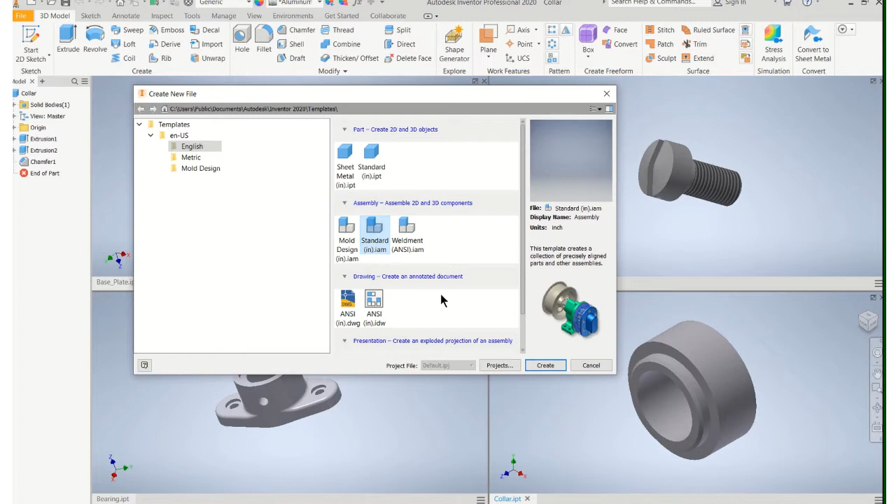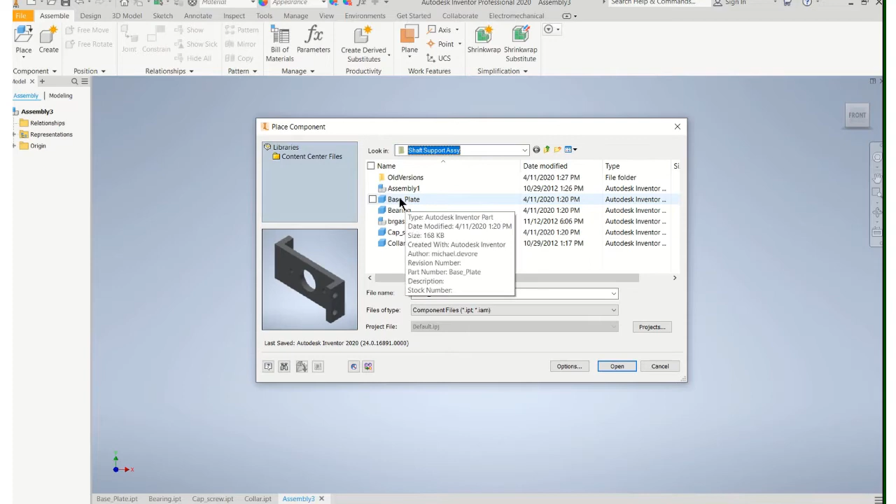So we'll start a new assembly, standard inch IAM, create, and I'm going to just have my one screen up here. Now, whenever you start, you always want to start with a main component of the assembly. Don't start with something small like the screw, for example. You always want to start with, in this case, the base plate. Let's zoom out a little bit, that's fine. So you left click, right click, and say OK.

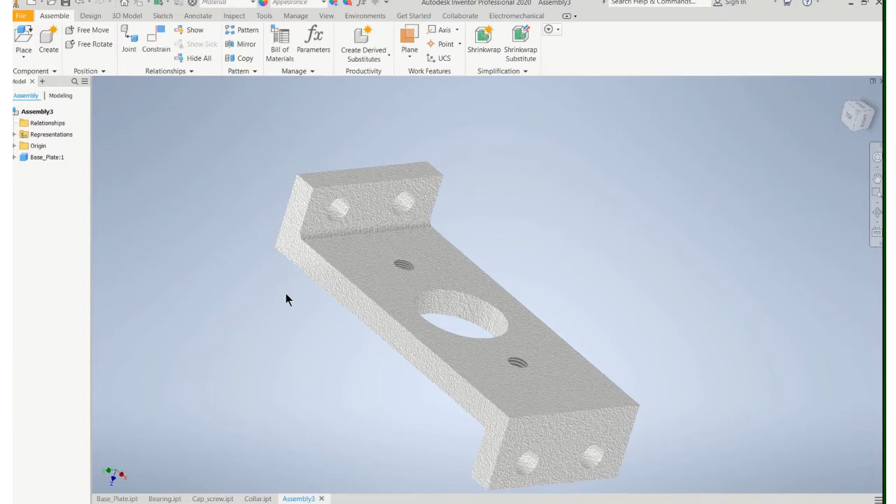Alright, so there's my base plate. And then I'm going to add parts to that in an order that makes sense. So the next part that I think I would add would be the bearing that sits on top of those, on that. So place the bearing.

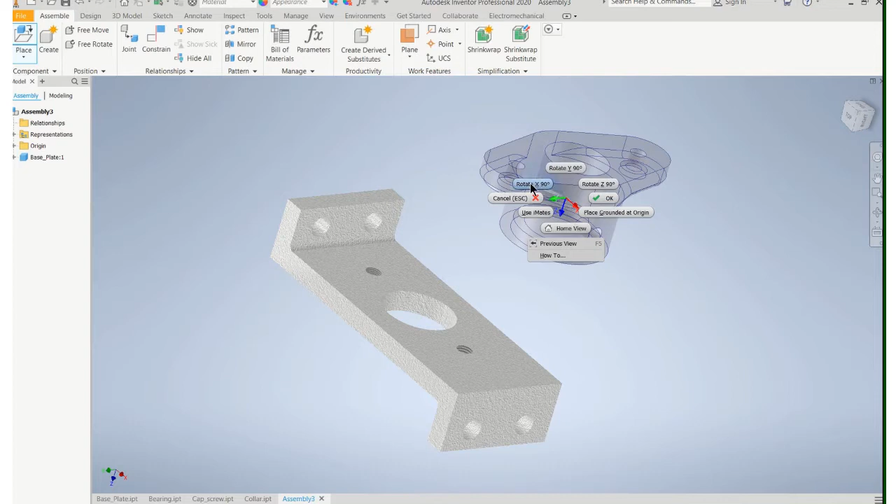Now before you say OK, try to orient this piece so that it's close to the way it's going to be when it's constrained here. So take a look at your axes. The red axis is X. If I spin it around the X, I can get the bottom surface the way that I want. Right click, rotate X 90. One more time, right click, rotate X 90. That's pretty good, let's stick with that. So now I'm going to left click, right click, and say OK.

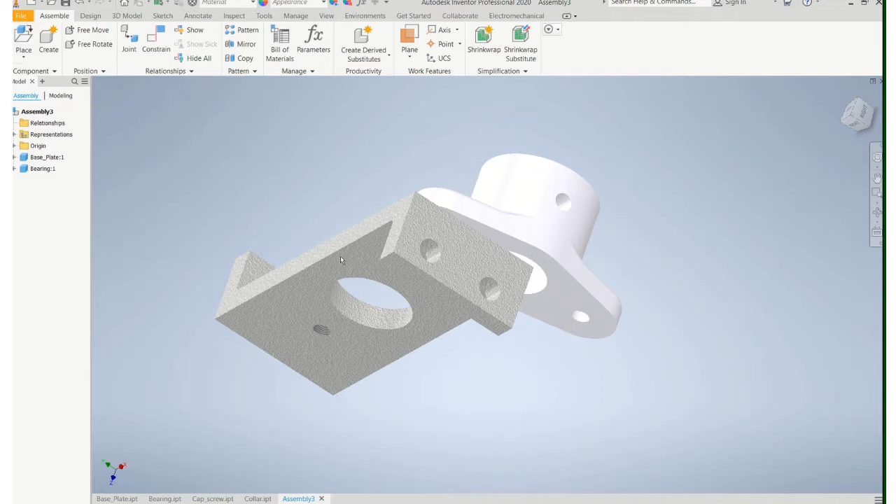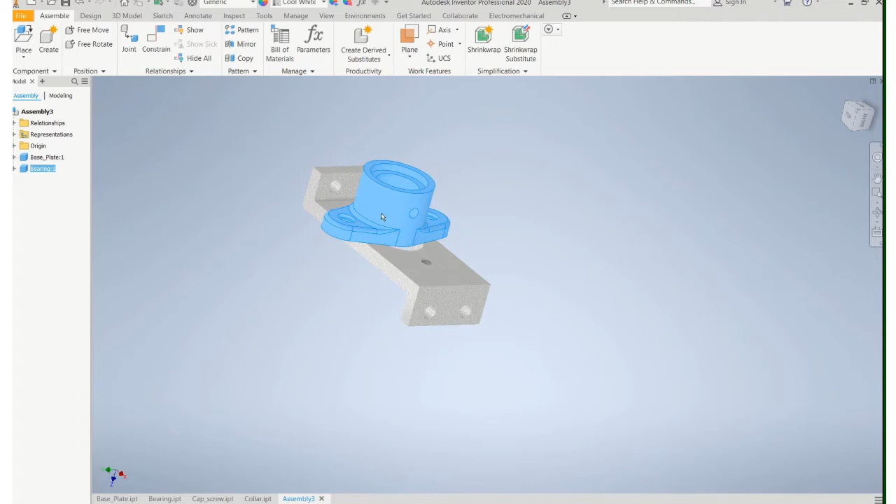So I think the first thing I'm going to do is constrain the bottom of the bearing to the top of the plate. Let's say constrain and leave all your defaults the way they are. Let's click on the bottom of that. See how, again, I'm getting the whole surface there. Click that. Now it's asking for the second input. Let me turn this. Second input would be that surface, and it looks good. Say OK. So now it's constrained to that surface. Again, because it's a three-dimensional space, it may not look like it, but it is constrained to that surface there. So I need some more constraints.

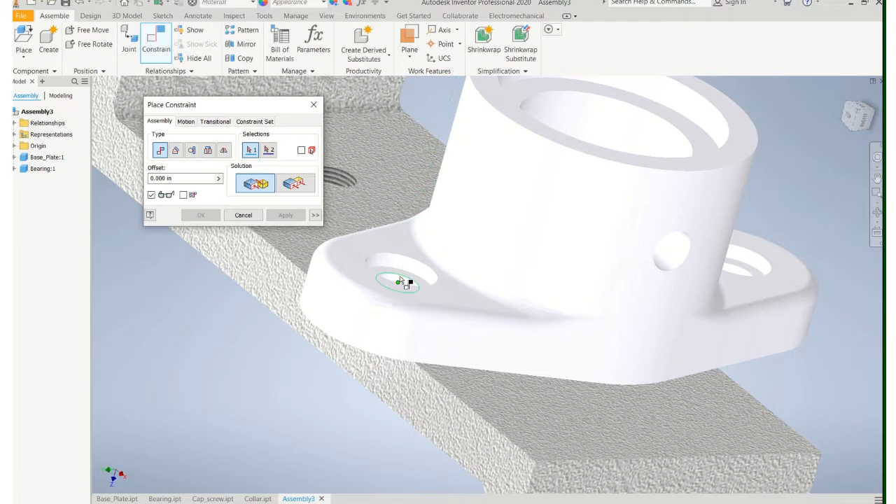Now whenever you have mounting holes, that's a really good way to constrain something. What I would do is use the center line. So I have the center line of that counterbore hole and the center line of my threaded hole. That's going to be my next constraint. Again, I don't have to change any of these. So move your cursor till you see the center line, not the circles, not the dot, but the center line. And likewise over here, when you see the center line, let's say apply. And I'll do the same thing.

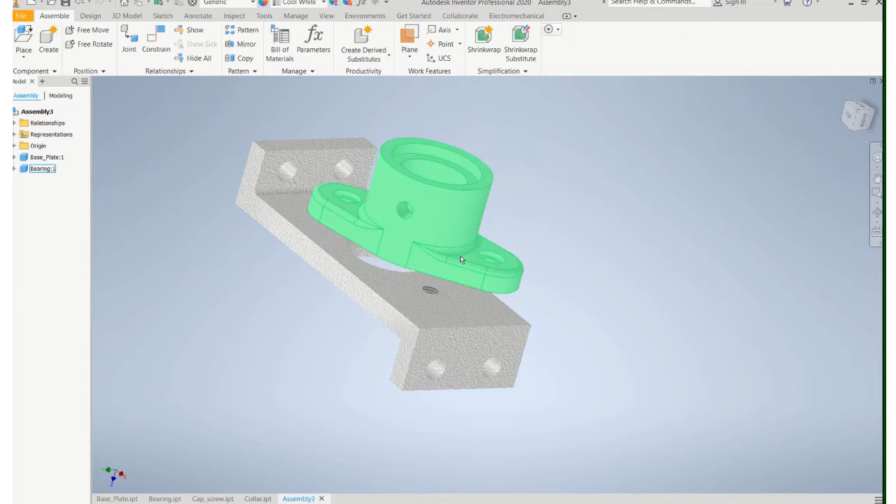Let's stop for a second and see what we have so far. So now I have it on the surface, and I also have it constrained to the center line of that. Now let's see if we can get that constrained. Same thing, make sure you see the center line and the center line, and say OK. And now that's fully constrained. So that's attached, and you can see the bolt holes line up. Everything looks good so far.

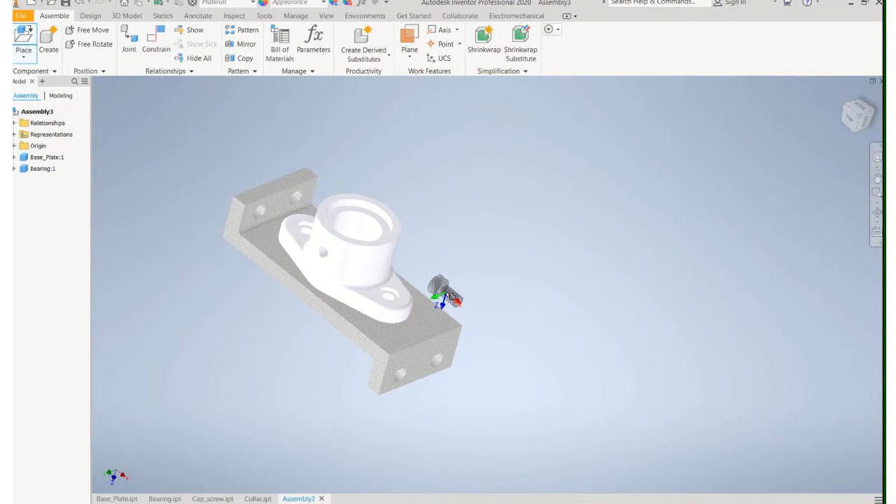Okay, next, why don't we put the screws in there? So let's go to place, let's put the cap screws in. We're going to need two of them, but let's do one at a time. It looks like if I spin it around the green axis, which is Y, that would put it in the correct orientation. So right click, rotate Y. Oops, got to keep going. Rotate Y, rotate Y, there we go. So that's the way I want that one. I'm just going to left click, and I'll continue because I'm going to add another one. The orientation is correct, so left click, right click, and say OK. If you want to keep adding, just click the left button and add another one. Click the left button, and when you're done, right click and say OK.

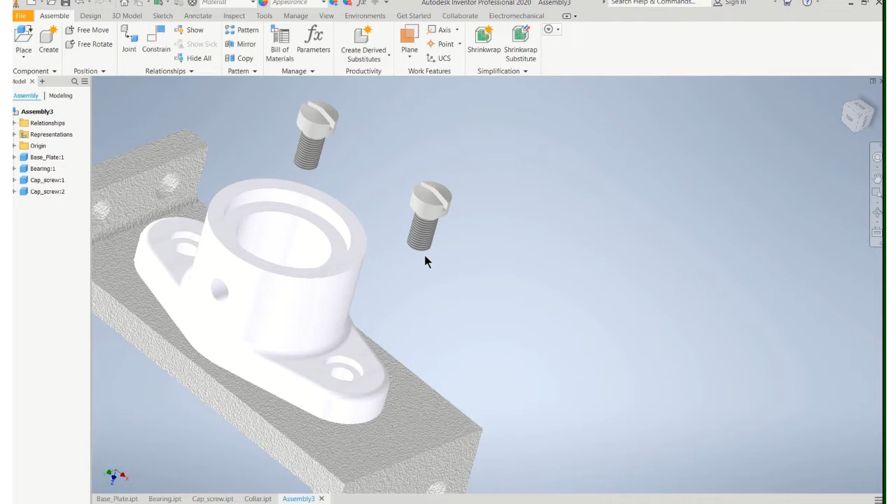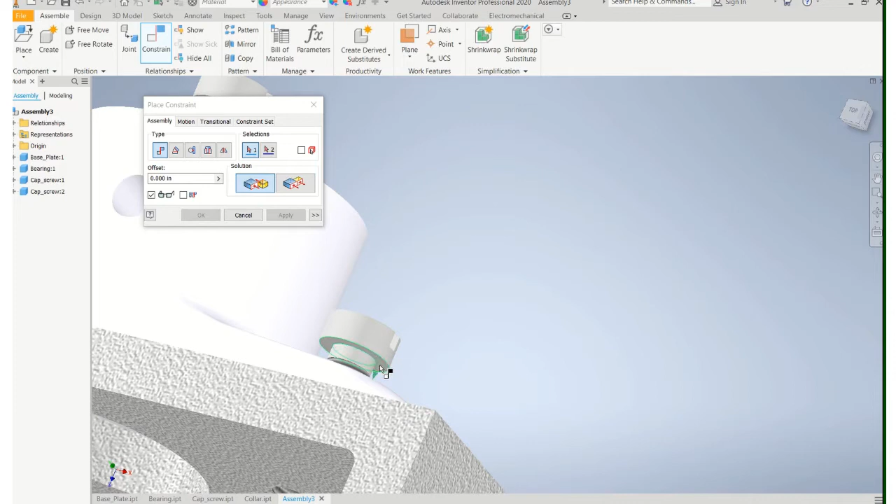So now I want to constrain these again because it's a cylinder and we have a hole. In order to constrain it, use the center line. So center line of that, center line of there, I'll apply that. Now let's turn this, because what I want to do is get the bottom surface. Don't get that circle, make sure you get the surface. You see the difference? With the surface it'll be outlined on the inside and outside. So there's that surface, that's my first input. And then I want to get down into the bottom of that counterbore and click that surface and say OK.

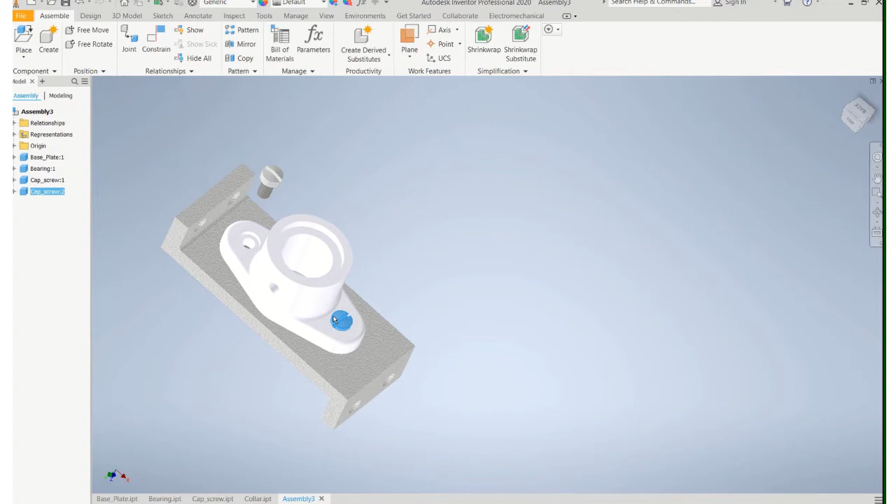So I got my one screw in. Now if you'll notice, I can still spin this screw, but I don't care about that. If I wanted to stop that, I'd have to put another constraint on there, but I don't really care about that.

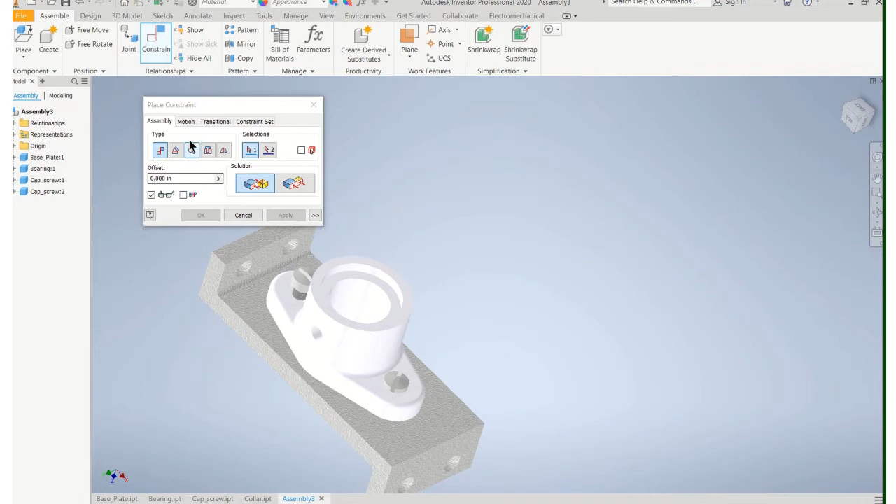Okay, let's do the same thing on the second screw here. So constrain, center line to center line, apply. If you hit apply, then the menu will stay active. If you hit OK, it's going to stop doing what it's doing. Okay, same thing, surface, bottom surface of the screw and the bottom surface of that counterbore, and say OK.

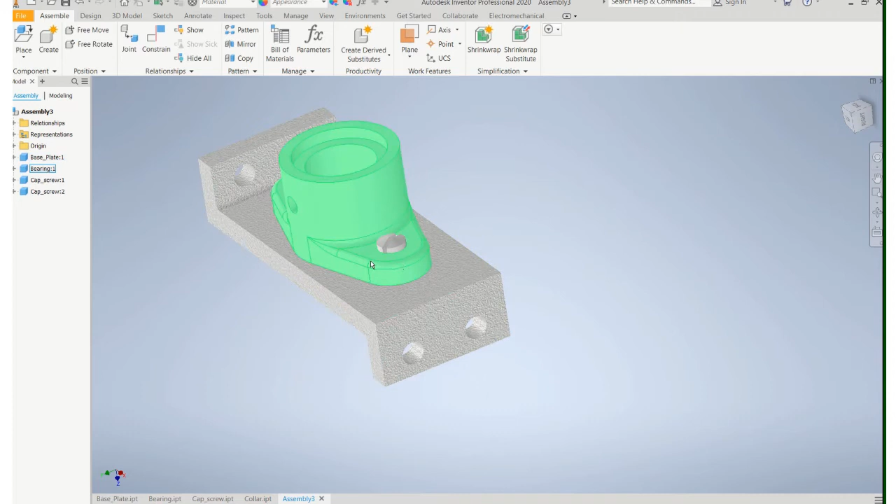Alright, so you can see there's one reason you might want to change your colors on your parts, because when you start to assemble them, sometimes they start to blend together. But that's good enough. I do want to add that the last piece is that collar.

Pay attention to the orientation. I got lucky there because that's the correct orientation, since it has to sit on top of there. So left click, right click, and say OK. Now the color is almost the same as that.

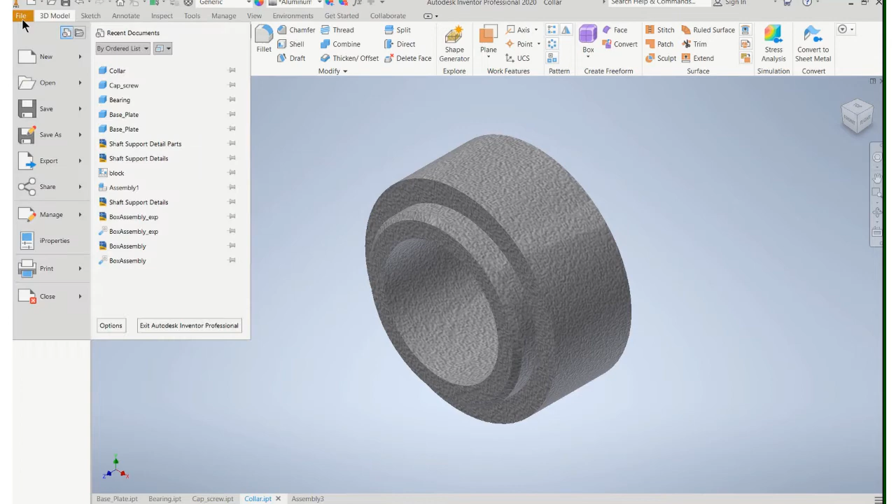I'm going to change that color. Let's open up our collar, and I can change it to something. You can do something weird on there if you want, but be careful, because that adds a lot to the file size, and your computer's going to start to struggle. So I changed it to like a cast part, just so I can see it. It doesn't affect anything, it's just a visual right now.

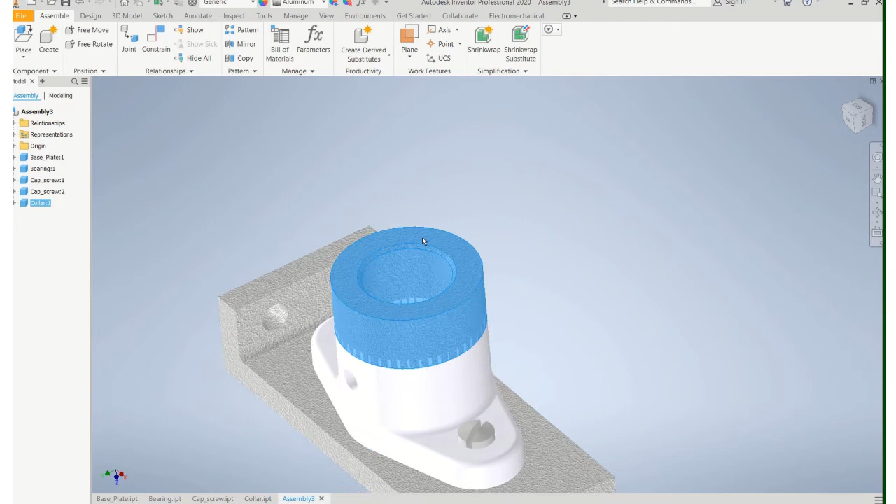Once again, to constrain that, the easiest way is center line to center line. I'll say OK, because see what it did, it actually put it down inside the part, and that happens. The software doesn't understand physics, but we know it's lined up with the center line. Then all we need to do is get those surfaces mated.

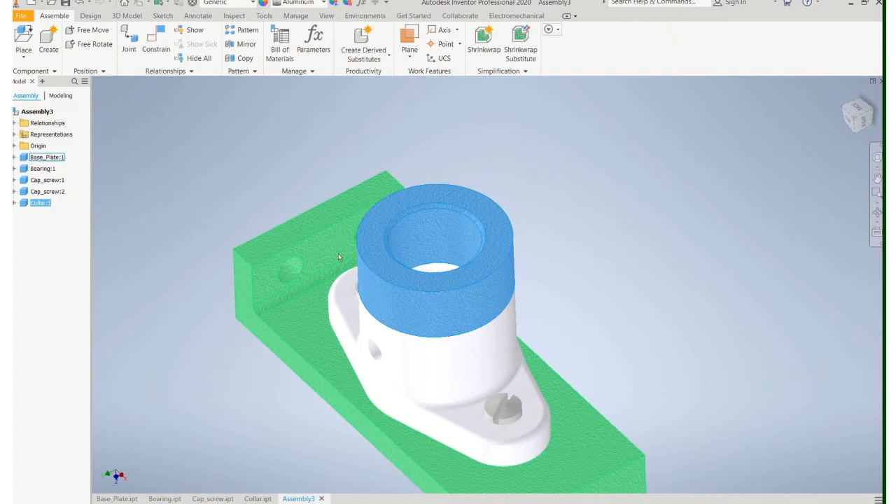So if we constrain that surface to that surface, say OK. Now again, you can turn this collar, but I don't really care, that's not really an issue. All right, so there's my assembly.

Now we're going to put that assembly onto a drawing sheet. Let's go ahead and save that. I'll do a save as, and I'll call that the shaft support assembly.

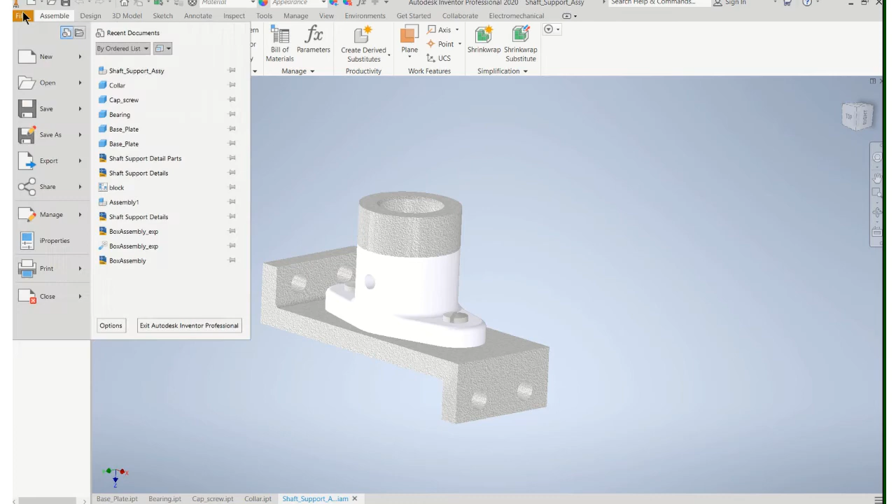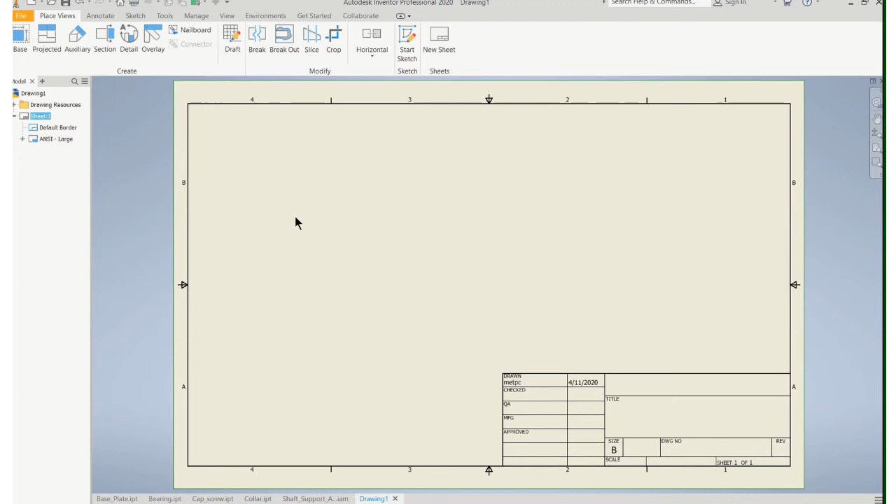And we're going to make a new drawing. We'll do File New, go to ANSI Inch Drawing, Create. Not going to use a D size, right? Let's change that, I think we can probably put on a B size comfortably. Now on an assembly drawing, you don't want to put orthographic views. You want to put one or maybe two isometric views, depending on the complexity of the object. So let's try to just do it with one isometric view.

So let's go base view. Let's make sure we have the right thing, because we got a lot of stuff open. Make sure we do have the shaft support assembly. And now let's come over here. I don't want an ortho view. I did all this work to create 3D models, I don't want an ortho view, but I want an ISO.

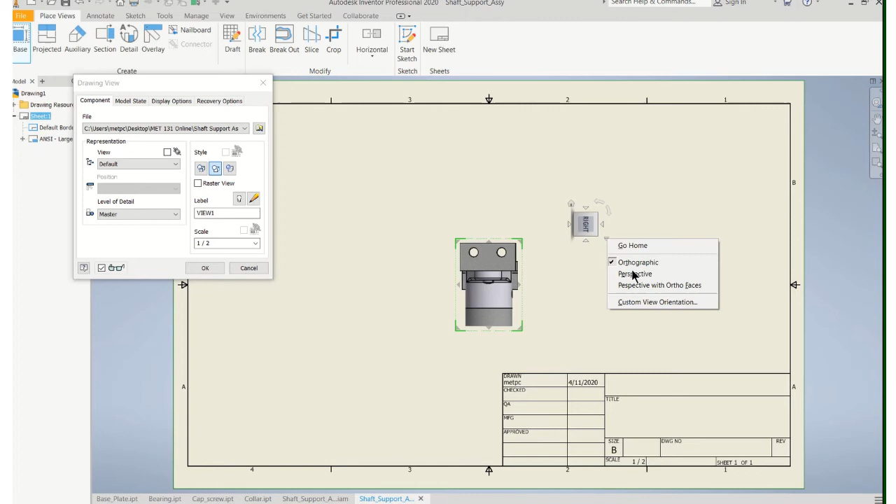So just come over here and click on this little arrow to the right of this cube, lower right hand corner, and click on custom view orientation. Now what I can do is get this oriented exactly the way I want to see it on the screen. A couple things you're trying to do: you're letting a person looking at this drawing see how the parts fit together, and also you want to be able to label each of these pieces. So I want to see as many pieces as I possibly can. That's a pretty good view.

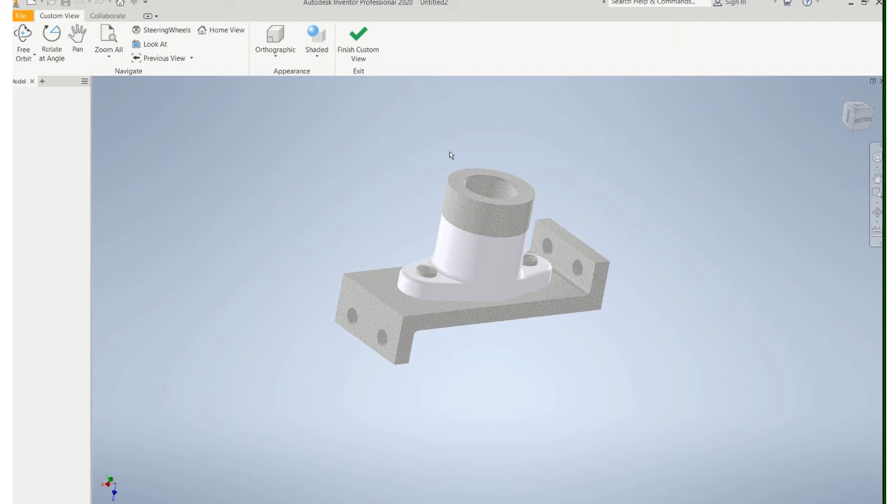So let's finish that. I'm going to change the scale. Let's see what full scale looks like. Try to make it nice and big. Don't get carried away, we don't need to put dimensions on here.

That's perfectly acceptable. Now, one thing sometimes you want to do is change the appearance and do this shaded view. Just beware, if you go to print that, it's going to take a lot of ink on the printer, but it does make a much nicer appearance. Don't shade in your details, because that's not necessary.

Okay, so the other thing we're going to do here with annotation is put balloons on each of these parts, and add a parts list. Go up to balloon, click on your first part. This menu is going to pop up, just say OK, and OK again. Then put your balloon where you want it, not on the part and not in some awkward position.

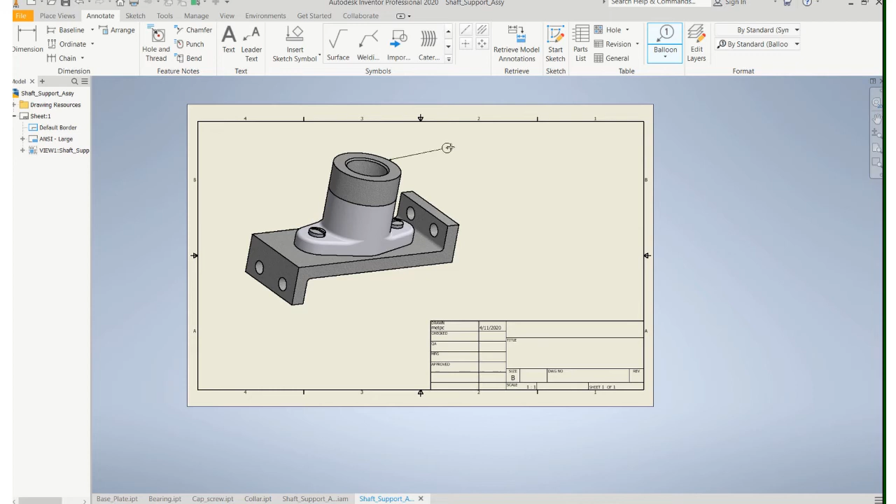Click, right click, continue. Go to your next part, click, move it out to where you want it. Click, right click, continue. What you're trying to do is make this easy to understand.

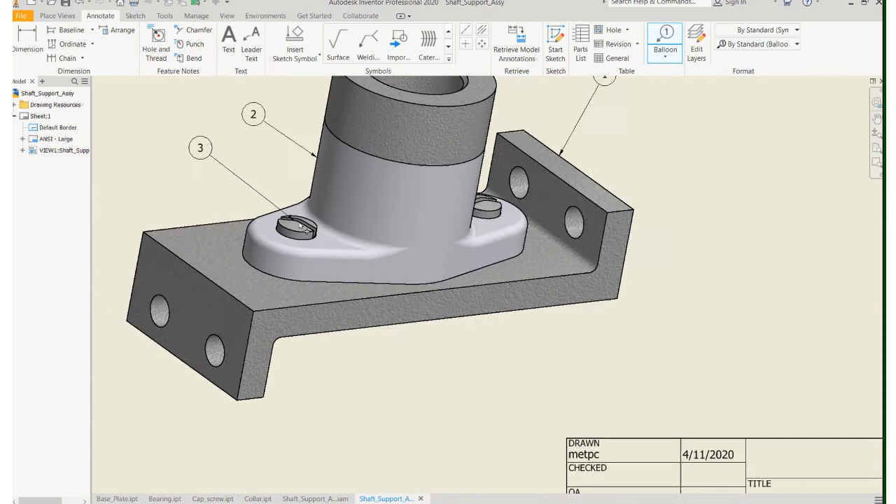So if I do the screw, don't do something like this. Don't make it awkward, pull it out here into an open space. It makes it really easy to see where the arrows are going, because it is hard to see sometimes when you zoom out. So that looks pretty good. I only have 4 pieces, so that's pretty easy.

And lastly, I'm going to add a parts list. So parts list, click inside the red box here and say OK. It's going to create a parts list. Now the parts list goes right here, doesn't go down here, up here, goes right there, right above. Attach it to the top of your title block.

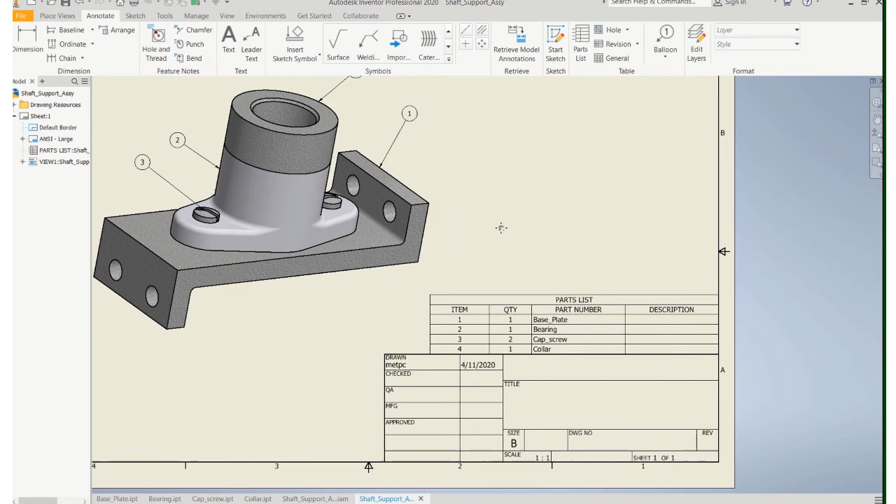Now I didn't save these when I was making these files. I did not save them as a part number. That's what shows up in here, the number that you saved your drawing under. So I should have added a number to there. I didn't, so that should say numbers, that's a little bit confusing. So make sure you put part numbers on yours.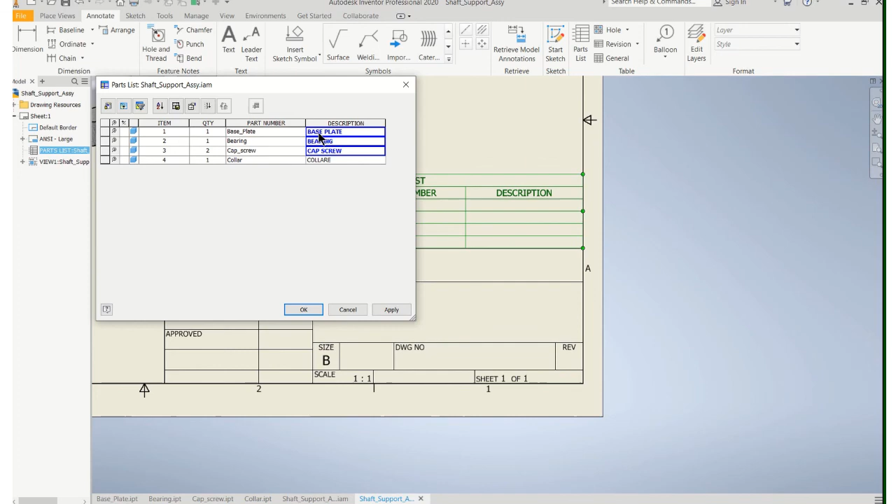As far as description goes, if you double click in here, you can just type in here, and this is going to be kind of redundant, but on yours I want you to have drawing numbers in the column that says numbers. You just hit enter to go to the next line, and then say OK, and that'll fill that out. Parts list shouldn't have empty spaces on there.

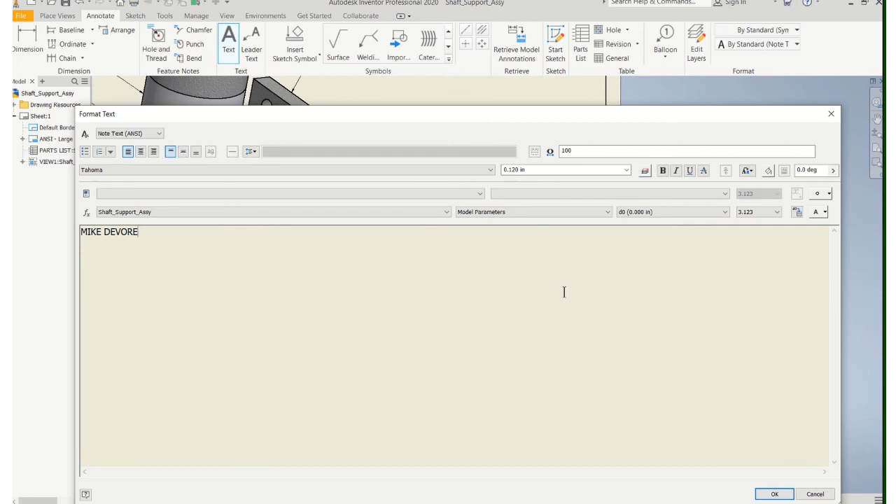And then of course fill out your title block, and this one's going to be shaft support assembly. And then you can put your name up here. And there's your finished assembly drawing.